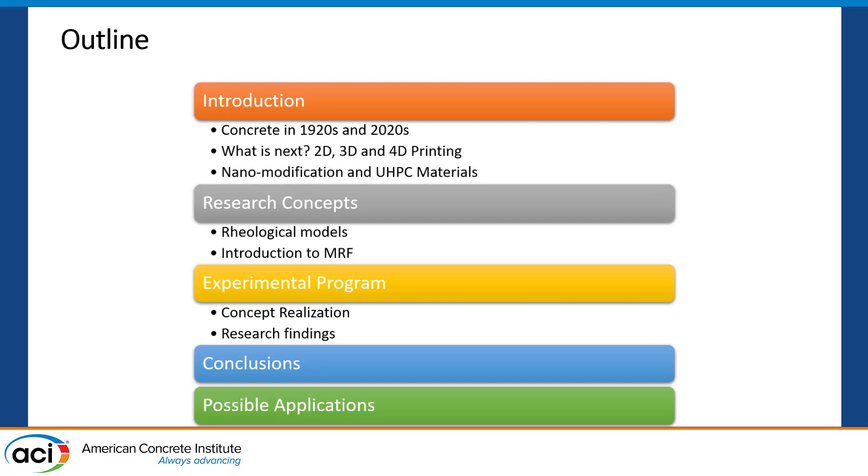And I'll briefly speak about challenges with concrete. I removed a lot of content about nanotechnology and nanomaterials, but I'll fill in as possible. When I was preparing the presentation, I wanted to look at what happened 100 years ago. What was concrete like back in the 20s? I searched through the Portland Cement Association library, and I came across this figure. I don't know if you recognize the face, but it is actually Edison. He was the first guy who constructed concrete pavement in New Jersey.

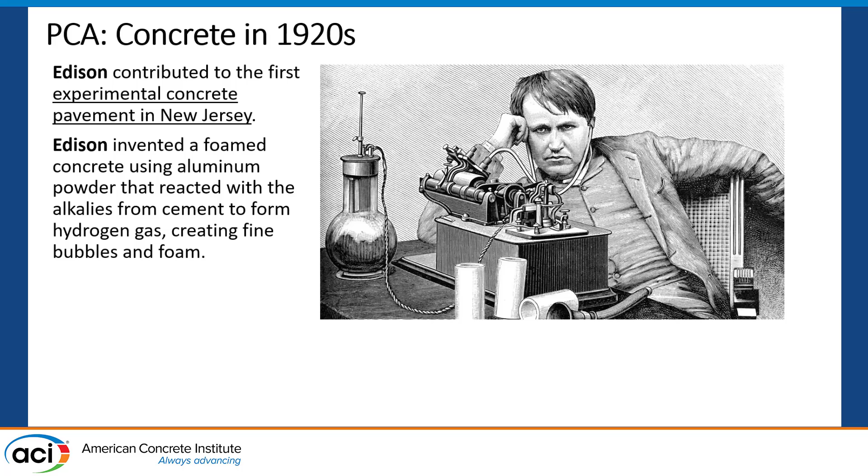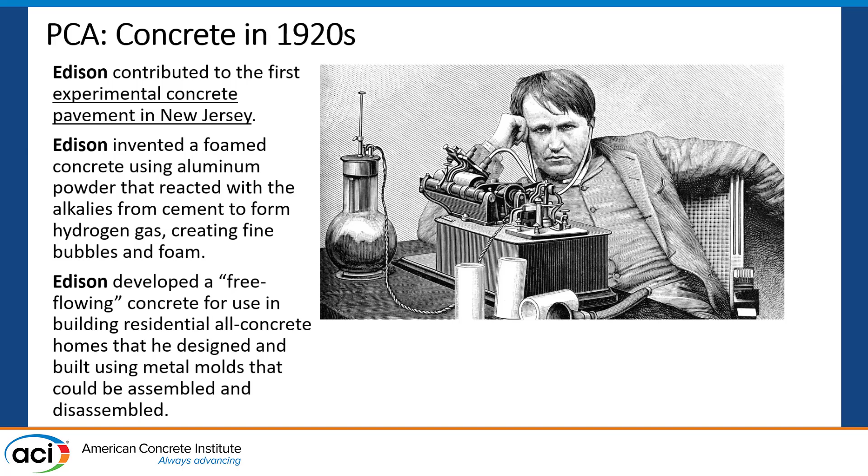It was some sort of discovery for me, and I looked further, and he worked on foamed concrete, and I was also not aware of it. To my shame, I was chairing the cellular concrete committee, and I was not aware that he was actually the first guy who invented it. He also developed free-flowing concrete, almost the self-consolidating concrete of the past. And he built a number of hurricane-proof concrete houses, which are apparently still there. Maybe they lost their initial beauty, but they're still there. So basically, he proclaimed the age of concrete 100 years ago.

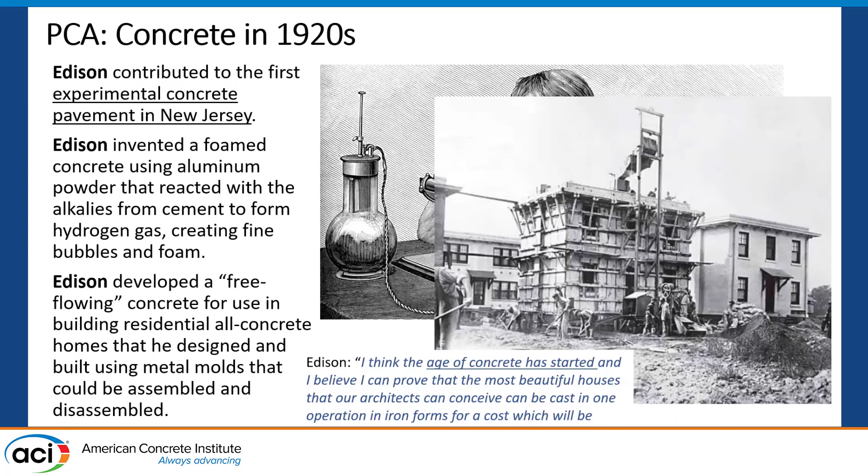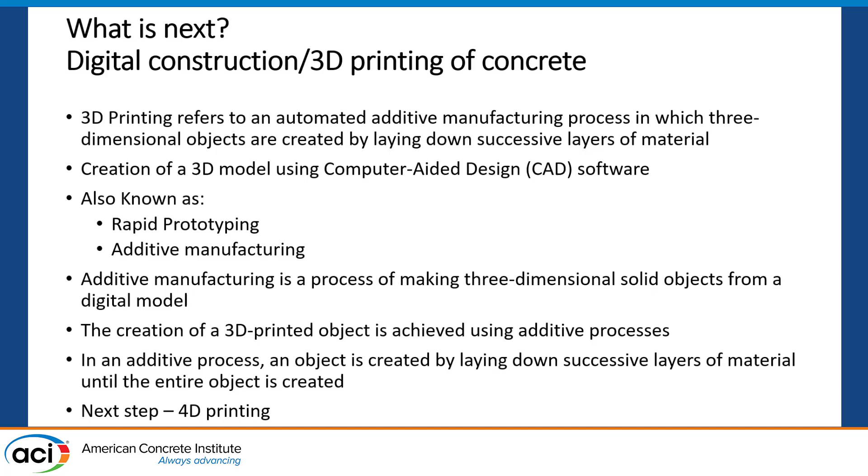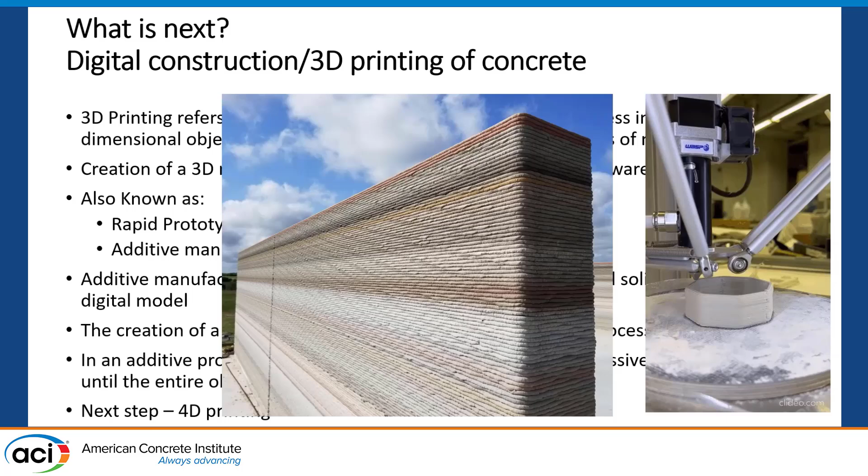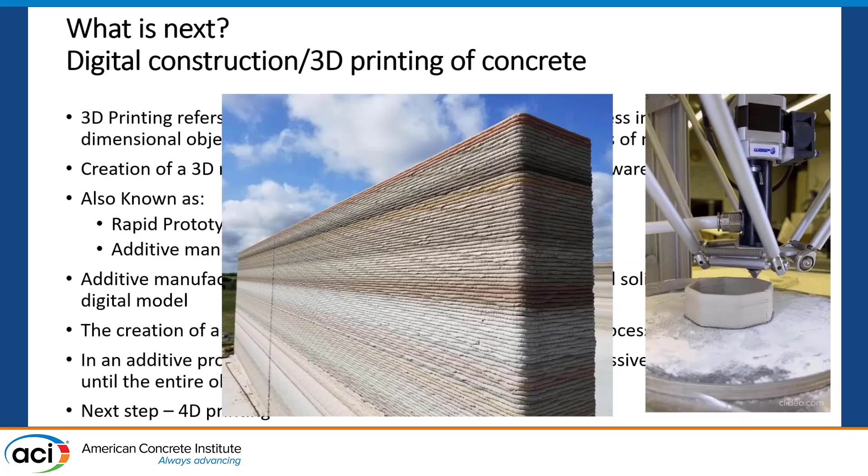Researchers very often focus on fundamental studies at the paste level. And between the paste and the scale, there is a big difference. What I realized is that it is more challenging to do 3D printing at the paste level, and it's a more forgiving technology at the mortar level when you scale it up. So this is good news for us. But what are the challenges with 3D printing? On one side, we need extremely fluid material, because transport and deposition happen when the material is still fluid, and you need really perfect flow properties. But as soon as it is deposited at the intended location, the material should freeze.

Our material cannot behave like a switch on and switch off, or respond to magic words. But can we design material so it responds to some other action? Specifically, magnetic field was one of the interesting approaches. A magnetic field is something we can induce, and especially with very powerful permanent magnets, you can do it without much energy consumption. So obviously there are challenges, especially if we want high performance concrete printing.

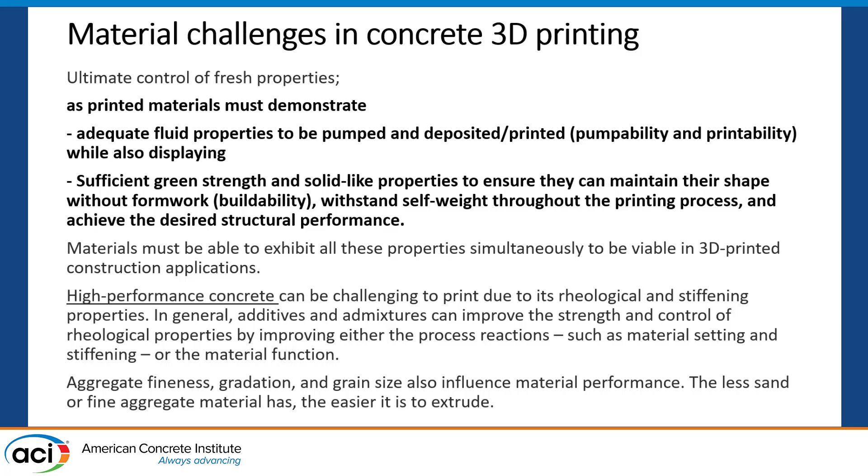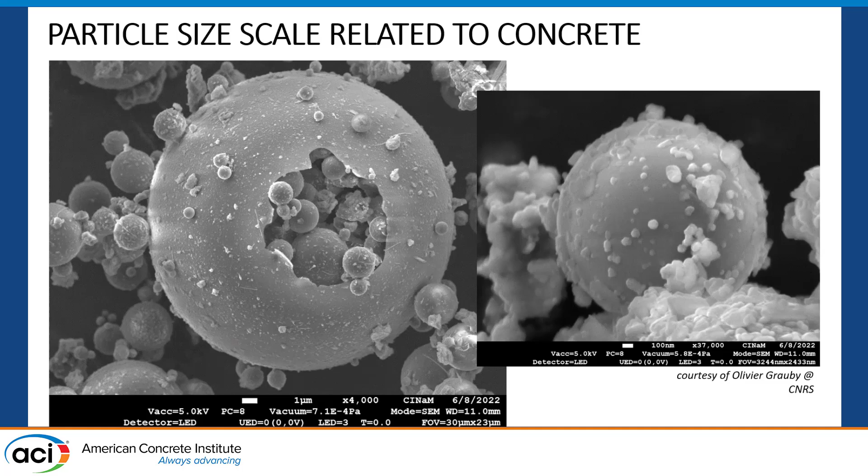So one of the ideas I had was, we produce ultra high performance concrete with nanomaterials. Can we 3D print this material? Obviously it was extremely challenging. We need to look at material optimization, basically fineness of aggregates, and do optimization from aggregate proportioning to particle size proportioning. Using advantages of components we commonly use in concrete, like beautiful particles of fly ash, can facilitate the flow, which we extensively use in the ready-mix industry. At the same time, we need to control the rheology, and nanosilica, for example, is a perfect material to control the rheological response.

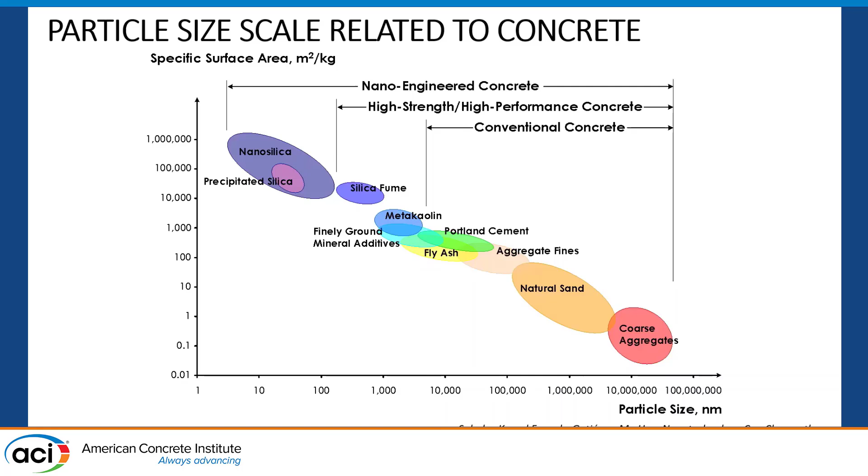Basically, it was a good question about viscosity modifiers, but as we already demonstrated, nanomaterials such as nanosilica or clay, nanoclay, or other nanomaterials are perfect viscosity modifiers, which are not interfering with hydration processes, actually even accelerating hydration, and they are really way better components for self-consolidating concrete.

So this is the setup which I saw at Ghent University. I was already playing with this extruding gun, and I was trying to achieve vertical printing, and it was a challenge for us. But when I saw the setup in Ghent, I came home and, in about 2 weeks, we put together another setup, so instead of printing vertically, we put it horizontally.

And basically, again, it comes to the point of how to quickly test a mix, and that is one of the challenges with 3D printing. You produce the mix and you don't have a testing standard, you don't have a way to test it effectively, and you feel that you need extensive 3D printing equipment, you need robots, etc. So the expense, even at research lab level, is considerable. But with such a setup, again, Milwaukee tool, I'm from Milwaukee, so I get the gun for free.

And so you can use it to test extrudability, but also with a moving platform, and again with changing support. So you can see this white plastic support. You can keep extruding, you can keep depositing. So basically you are in sample production mode, and you don't need to have a huge system.

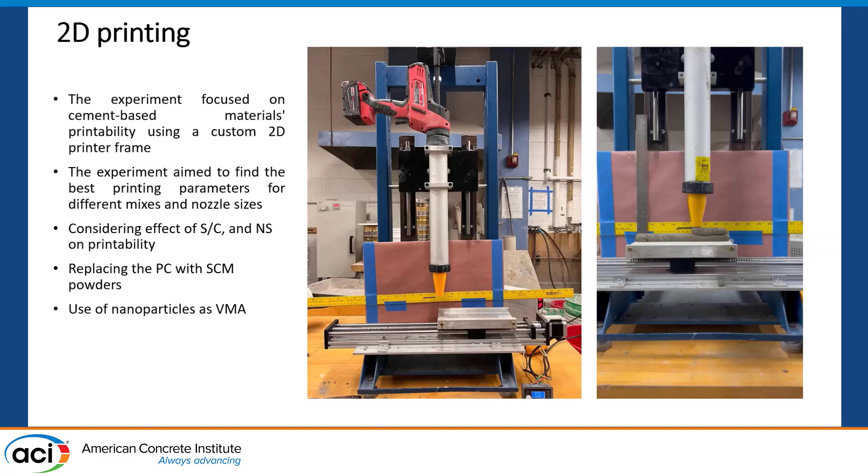And anyway, so basically we deposit layer by layer. We can build as many layers as we want, and we can observe the response immediately. And as a result, we can see different compositions. We can compare them. We can compare thicknesses of the layers. We can check the geometry. And buildability can be easily evaluated.

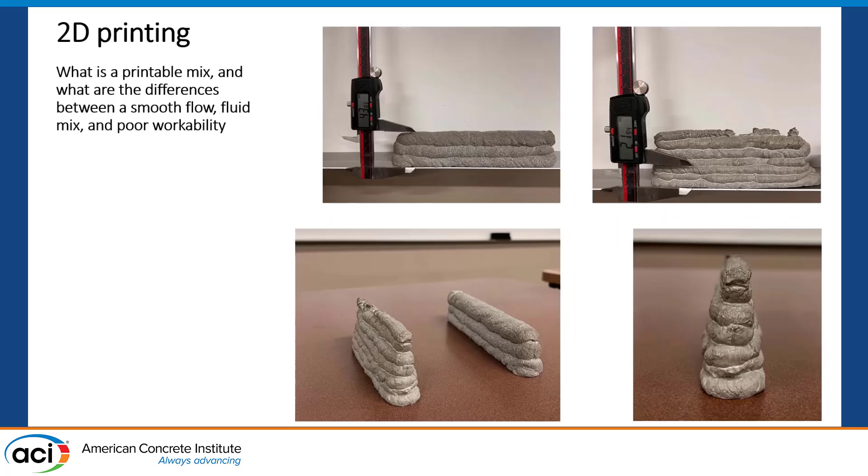I think this approach can be easily converted to testing, and we can easily generate a document which can help us to test a good mix and achieve material properties optimization using this system. And again, for example, as one approach to design the mix, we simply can use the classical flow table, and we can easily distinguish a printable mix from a non-printable mix.

And with 3D printing, you don't have that much freedom anymore. You have a very narrow band of compositions which can be extrudable and which can be deposited. And these are classical mixes. You don't have any chemical admixtures. You don't have viscosity modifiers here, just simply regular mortar. Well, the mortars are a little bit richer than the classical ASTM mixes we do for the compressive test or for the classical flow table test. So again, those are the approaches we can use to test the material.

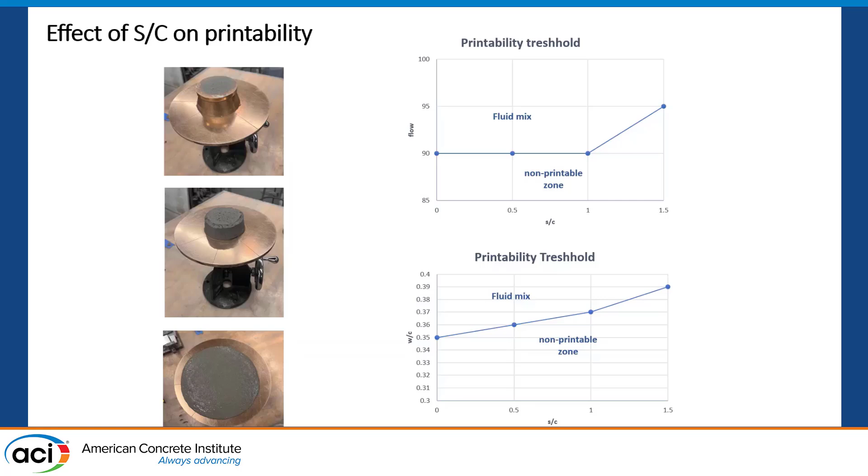And finally, we come to the point that we still need to characterize the material, and we need to use rheological models. What we have as classical models are the Newtonian response or Bingham response, and obviously with 3D printing, we like to see yield in the system. A Newtonian system cannot be used for 3D printing, because you need the material to sustain the stress. And in reality, the Bingham model is represented for many systems by the Papanastasiou model. So you have a curvature associated with the curve.

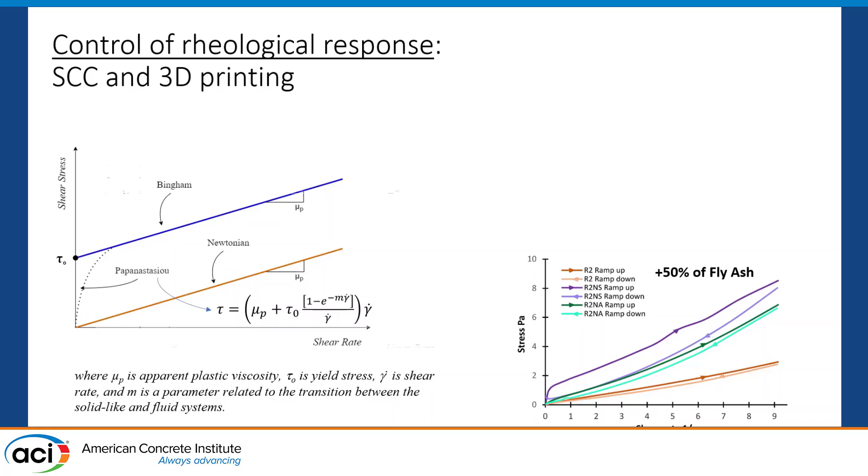And so the challenge, again, when we use fly ash in the system, is to produce the right response. But what is the ideal response? Bingham is good, but what happens if we can have a material which has additional stiffening at a lower shearing rate? Because when you deposit, your shearing rates are reduced to zero. So if we can have a material with such a rheological response.

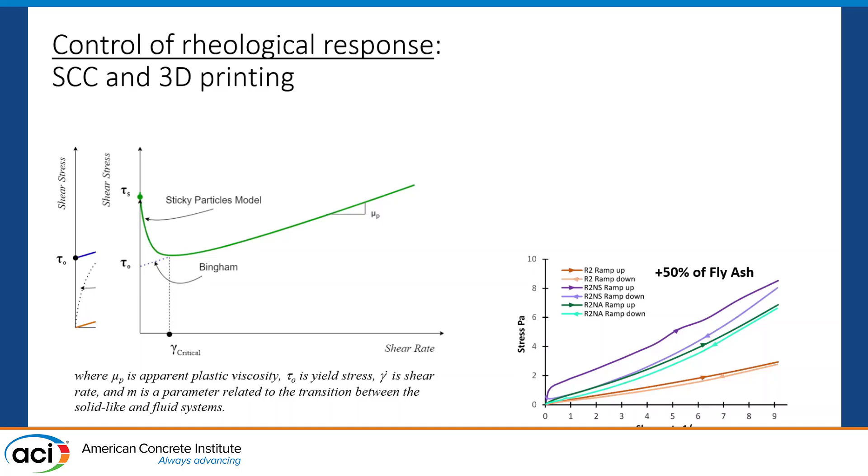And I look at the tests with nanoparticles which we run, and I realize some of the experiments resulted in this stiffening mechanism, what we call the sticky particles model. And this is the response which is actually extremely beneficial for 3D printing applications. So this is the response of nanosilica, when the system would show relatively small yield, but it actually has very high stiffening and very low shearing rates.

And well, we have nanosilica on the top, nanoalumina is in between, and this is just the response of the pure Portland cement system. So very small quantities of nanoparticles can change yield, but also can provide additional stiffening. This is what we observed. And again, nanosilica and nanoalumina here compared.

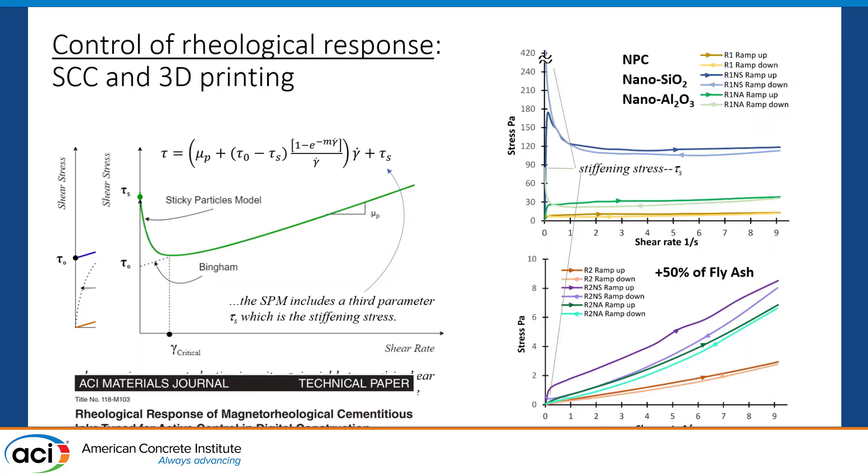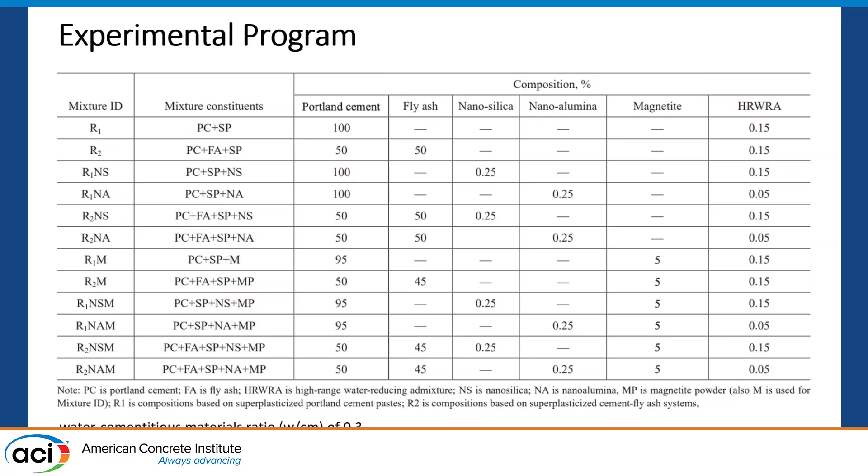Well, results were published in ACI Materials Journal some time ago, and you can look at it more, but in the experiments we ran, in addition to nanoparticles, we liked to add fly ash, and also we tried magnetite particles. So in addition to nanoparticles, which were used in very small dosages, magnetite is not really an exotic material to us. It is a black pigment which we use for architectural concrete. And usually 5% is a normal dosage if you want to change the color of concrete to a desired shade.

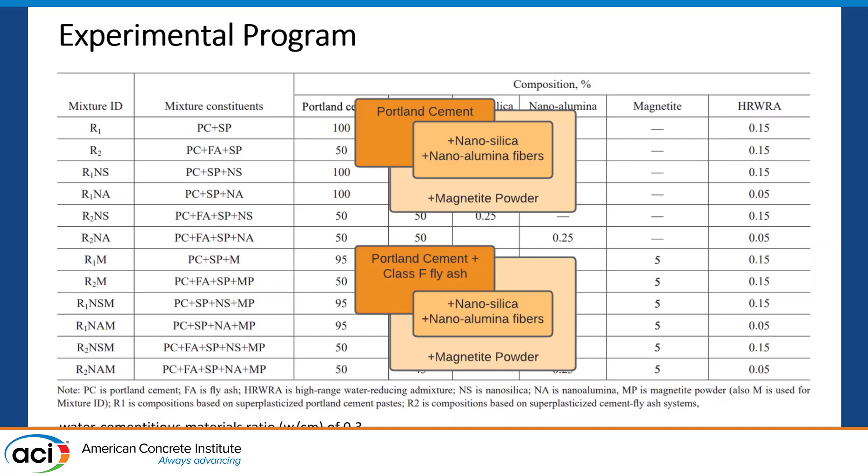And so magnetite, again, is more expensive than Portland cement, but it is something which is in our toolbox, which we use in concrete technology. And again, it is a highly magnetic material, and it is an attractive component. Well, why am I talking about fly ash? Because fly ash is magnetic by itself as well, especially type F fly ash, which has considerable quantities of iron oxide.

And here the idea is to, again, incorporate magnetic components, including nanomaterials, which can help with viscosity control, and for the material to respond to an external magnetic field. And again, the switch from liquid to solid is the desired response which we target here.

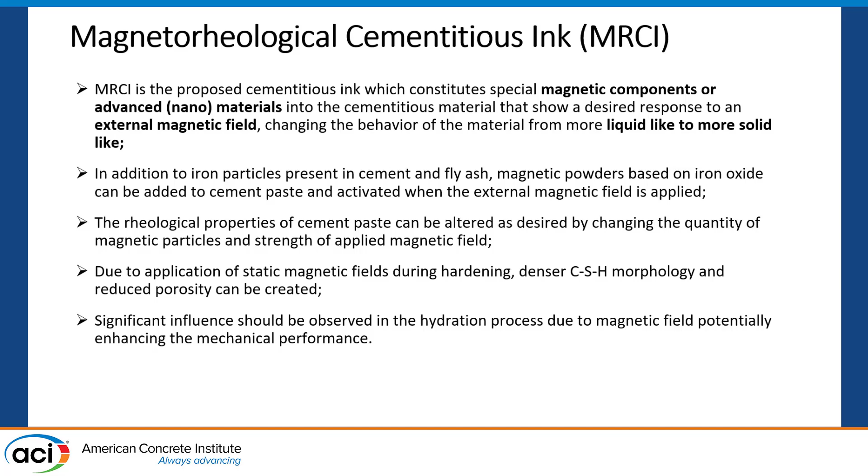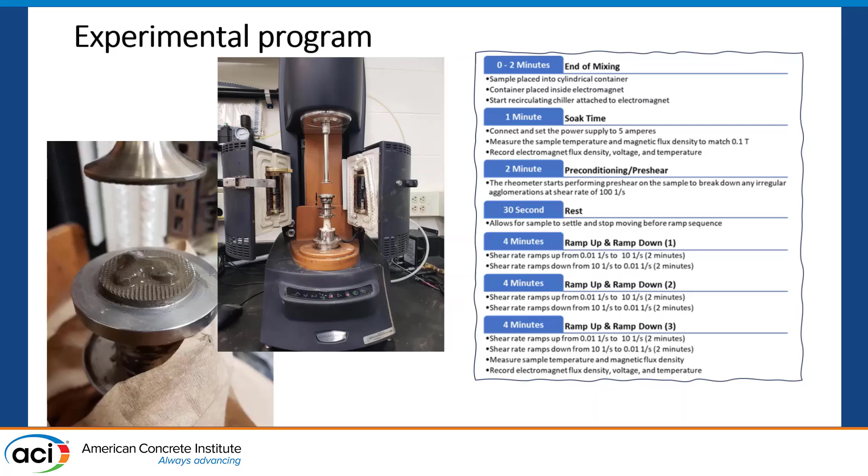And again, this is our setup, a classical rheometer, which is used for different experiments. And we tried different geometries, parallel plates, serrated plates, and it didn't really work for the range of viscosities and the range of shearing stresses which we tested. So we had to switch to vane geometry. And in addition, to control the magnetic field, we had to build an electromagnet, and we use a constant field, but it can be easily switched to AC as well.

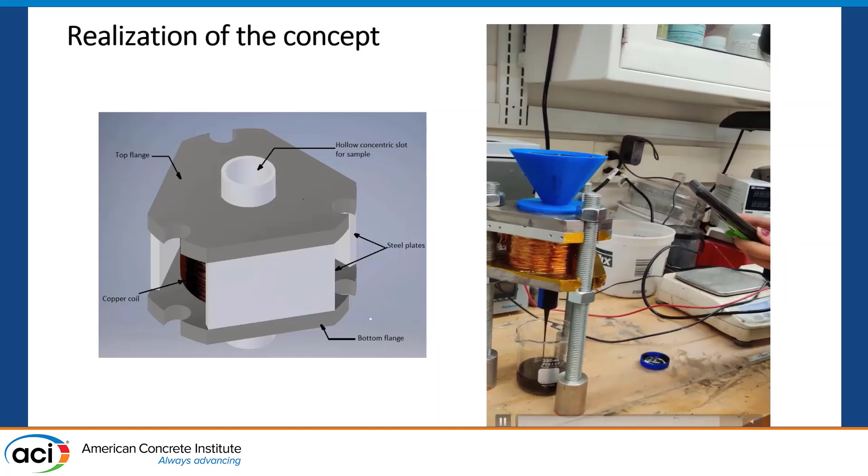The funnel is full, so you have enough material, enough pressure for the material to flow. But obviously, these chunks are magnetized material. Now we have free flow of the material through the funnel. And again, this was one of the first experiments to demonstrate the concept and basically use this setup as a magnetic valve.

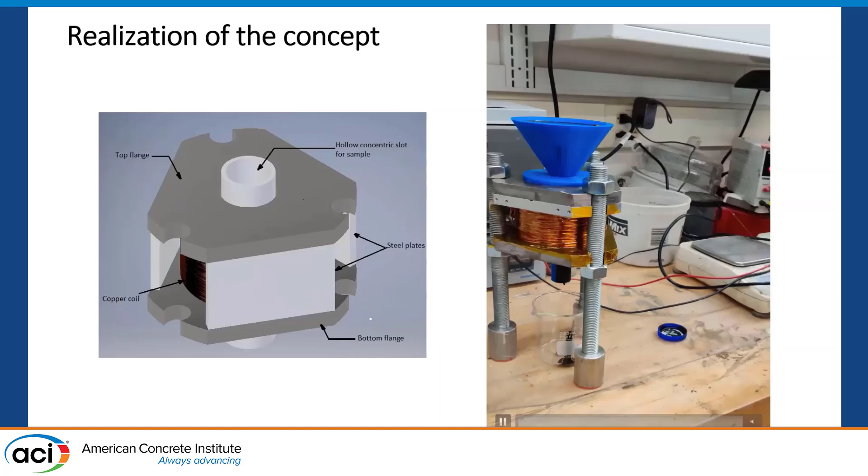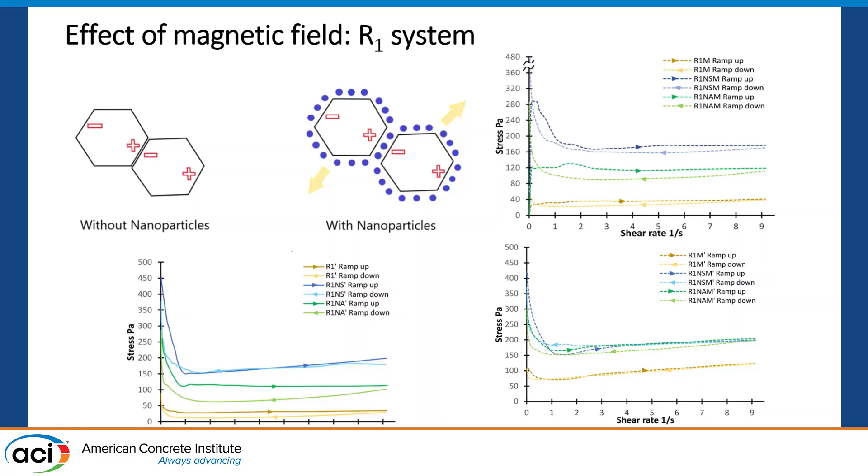Well, when we use the system with fly ash, I initially demonstrated that this system is not very suitable for 3D printing applications, but you can see that the Newtonian response from the reference 50% fly ash system can be converted to a Bingham response, and in systems with nanoparticles the response was really enhanced.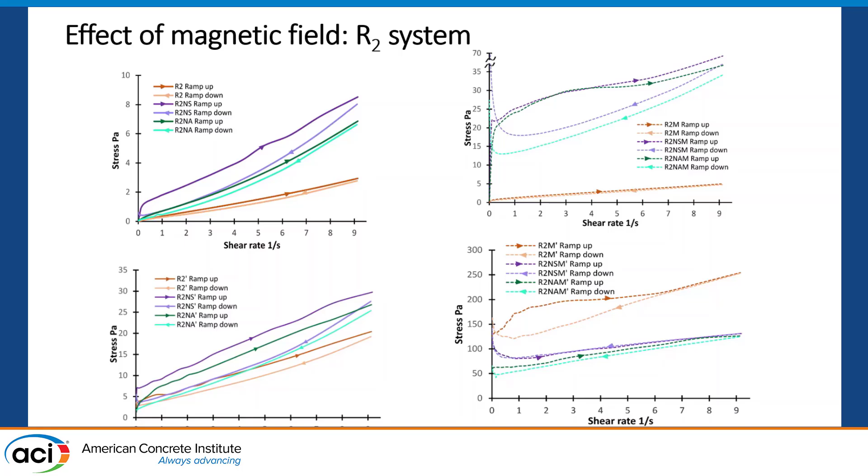Extremely fluid systems can be stiffened significantly by applying a magnetic field, especially systems with magnetite powder. And you can see the complete transformation of the reference material with just 45% of fly ash and 5% of magnetite powder. It was Newtonian behavior without magnetic field, and with magnetic field, considerable stiffening is achieved. Again, compatibility between magnetic inclusions and nanomaterials needs to be further investigated.

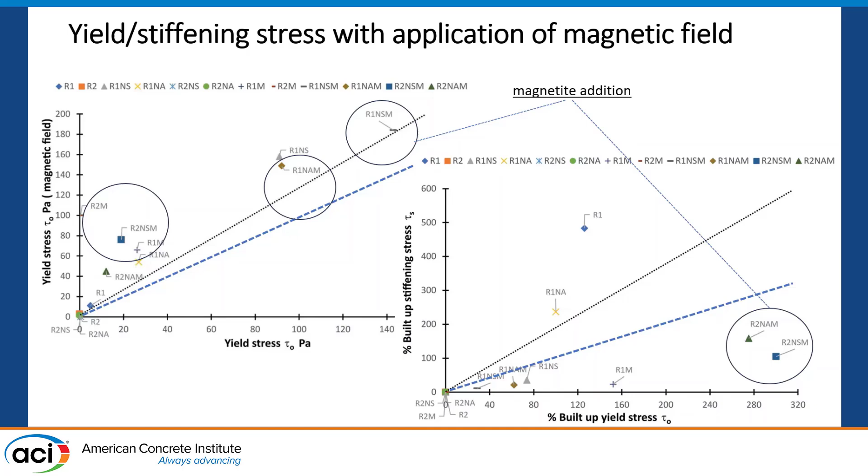To summarize the effects, I can compare yield stress of material without field and when we apply magnetic field, and you can see that enhancement of the yield was demonstrated for all the materials we tested. And another important figure: in some cases stiffening stress was also enhanced for some compositions. And specifically, the magnetite addition was very beneficial to achieve the top levels of performance of the investigated systems. Again, magnetite is not a nanoparticle, but it is smaller than 1 micron, so sub-micron particles. And they were also providing a very unique response.

I think I have maybe 5 more minutes.

Okay, so now the question was about how to make it cheaper and where we get these wonderful magnetic particles. Well, fly ash is a perfect source for us. We see less and less fly ash available for our projects. There is still fly ash deposited, and this is the setup we had for beneficiation of fly ash. And basically the idea is, can we extract magnetic fly ash from already relatively rich types of fly ash? And we had a few products which were ranging from 11% to almost 19% iron oxide. And those were perfect candidates to study.

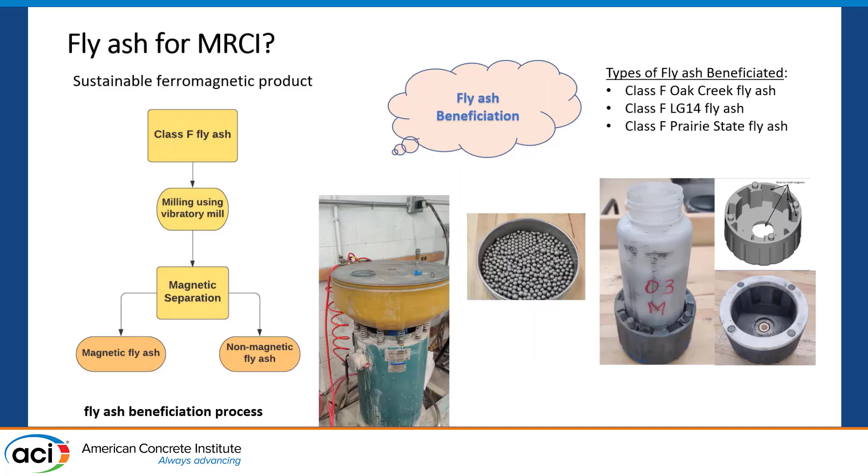So we ran milling and we ran magnetic separation. For milling, we use the vibratory mill. Normally, we use wet milling. And we would use a magnetic separator to separate the slurry of non-magnetic ash, which would, of course, contain some magnetite particles, magnetic particles, and the magnetic ash, which would also contain reactive aluminosilicates, etc. So it's not really pure separation. But having two products was an extremely interesting idea for us.

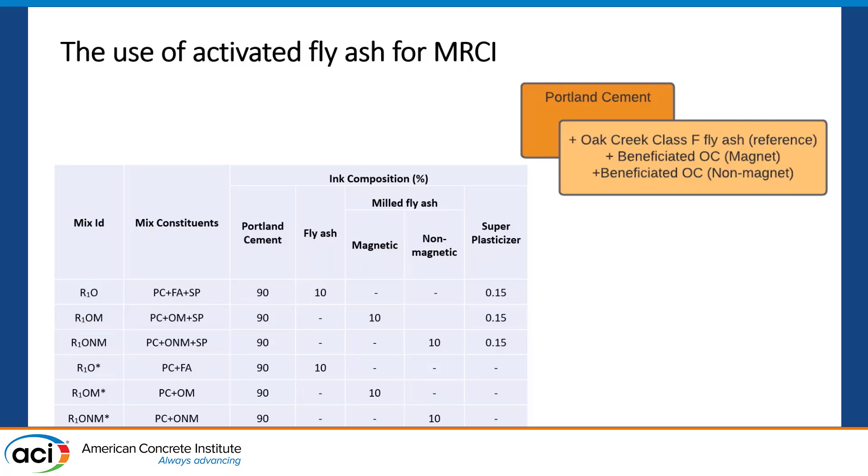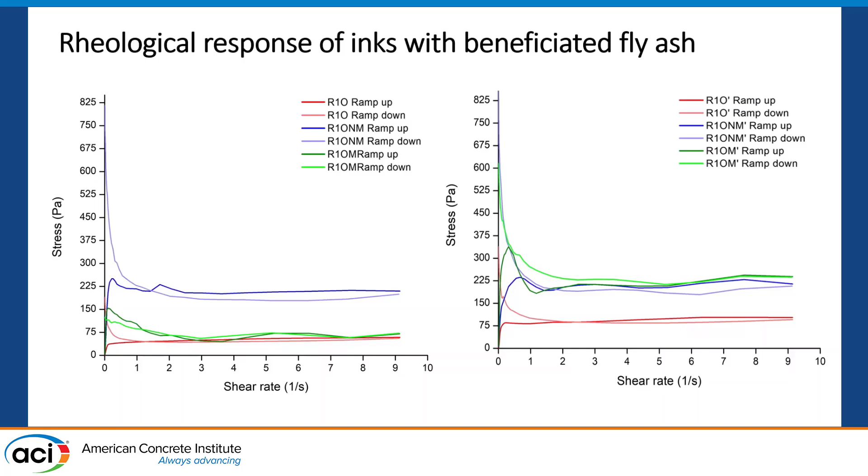And so we ran additional experiments with fly ash, just 10% replacement, magnetic ash, non-magnetic ash, mainly with superplasticizer, but we also ran non-superplasticized mixtures. And what we realized is that non-magnetic ash was actually providing us a better yield and stiffening as well, because of ultrafine particles. But magnetic ash was not as reactive without magnetic field. As soon as magnetic field was applied, the response was very similar. But non-magnetic particles were not affected by the magnetic field.

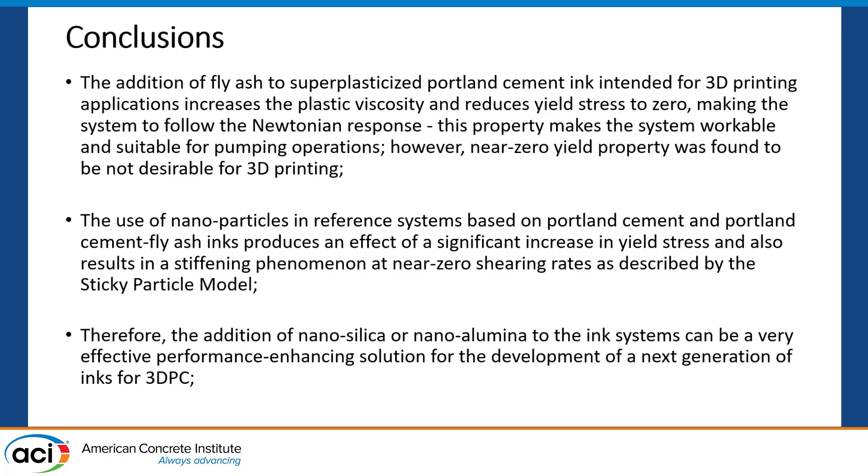And again, what we see is that if you simply use fly ash systems, sometimes it's difficult to achieve the desired performance. Obviously, we can improve it with nanoparticles, and nanoparticles can provide the desired response, which we described by the sticky particles model. And this can be a good solution. But if we want to design the magnetorheological response, and our field was 0.1 Tesla for this experiment, this can really change the rheological response, but we need to be very careful in balancing the type of nanoparticles and the type of magnetic particles we use in the system if we want to be effective.

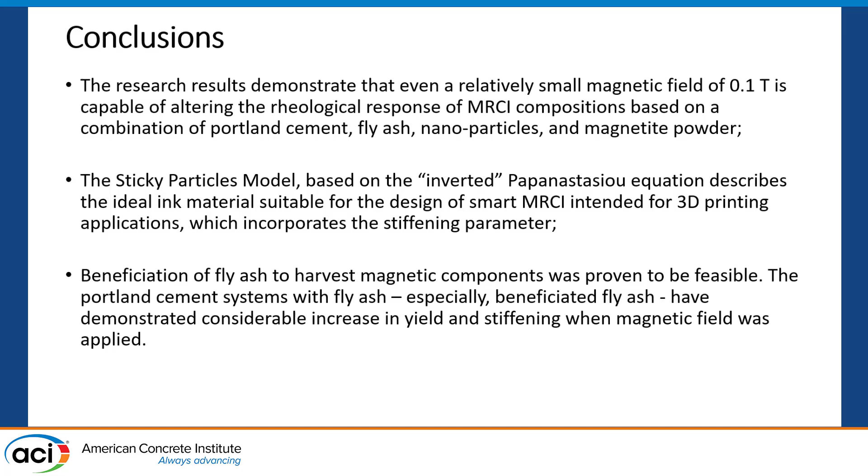Obviously, I really like to explore more the sticky particles model, because this is something I believe is extremely useful for 3D printing. Fly ash beneficiation, I think, is a really interesting direction which can be further explored, to harvest very cheap magnetic particles which are available to us.

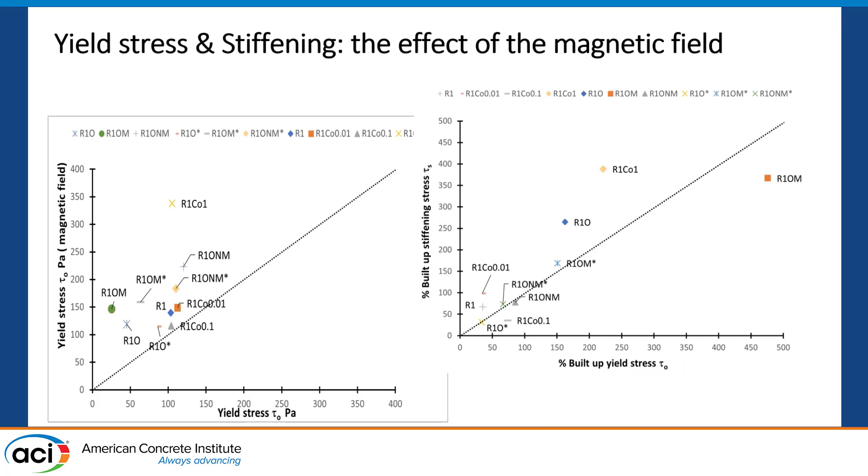I removed the slides on hydration, but we demonstrated that magnetic particles work in a very similar way as reference fly ash on hydration. So we don't see that pozzolanic activity is completely destroyed. The idea is we still like to have a magnetic particle which is magnetic on one side, and on the other side still preserves reactivity.